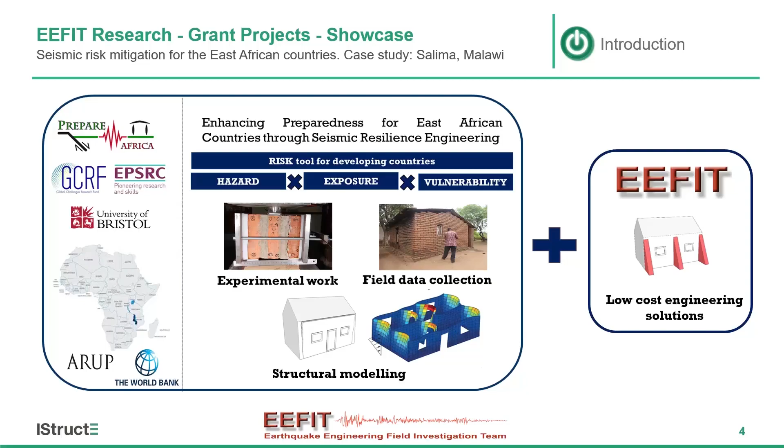And thanks to EEFIT, thanks to this grant, they have supported me in investigating something more specific. Thanks to this grant, I'm looking in more detail at some low-cost engineering solutions for East African countries. Through this presentation, what I'm going to do is bring you to my African experience, if I can say that. So we will look together at the challenges and how I went through to solve them.

I don't know how much you know about Africa. When we talk about Africa overall, there is poverty. If you are born in Africa, you are in poverty. There is a very low income class, and then there are rich people. But most of the people in Africa belong to the poverty level. So there is this perception that there is no hope of lifting people from their poverty, so there is no real long-term solution.

But this is not what I think, and it's not what the people working for developing countries think. And it's also not what EEFIT thinks, because it has funded me on this research. I really believe that light can be brought to these countries, because I've been working in Africa for a few years, and I had the opportunity to meet African people. African people are positive. They have this attitude of doing things in the right way. And they are curious, so they want to know more.

So for us, working on this type of project, we have the opportunity to increase awareness in these countries. How? We can do that by making them understand the difficulties they have when an earthquake impacts a very vulnerable country, as are the different countries in Africa.

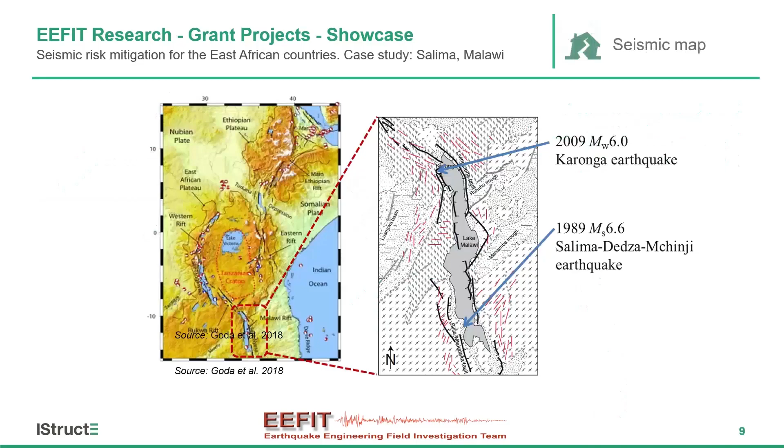Here you can see highlighted 2 major earthquakes that occurred in this country. One was in 1989, another one in 2009. Both earthquakes affected thousands of householders and caused thousands of damaged and collapsed buildings. So the question at this point is, how are the buildings in Malawi?

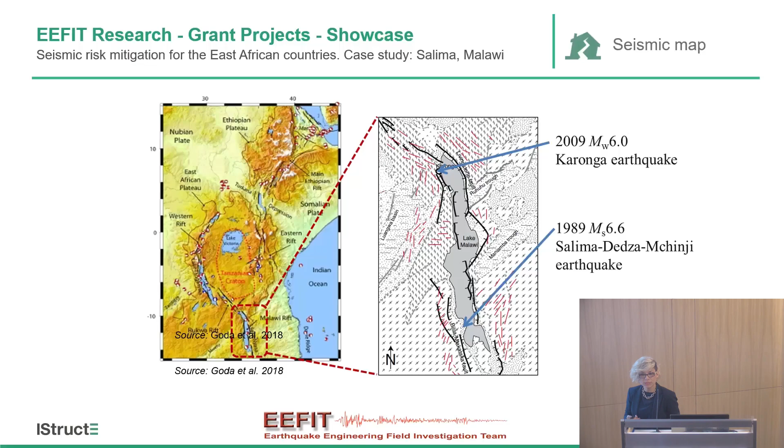Generally, to answer this question, what we do is look at the codes and the guidelines. In Malawi, officially, there is a design code for masonry structures. The design code is based on British standards. So you can already imagine, you don't need me to make you understand, that these codes are difficult to apply in a country like Malawi.

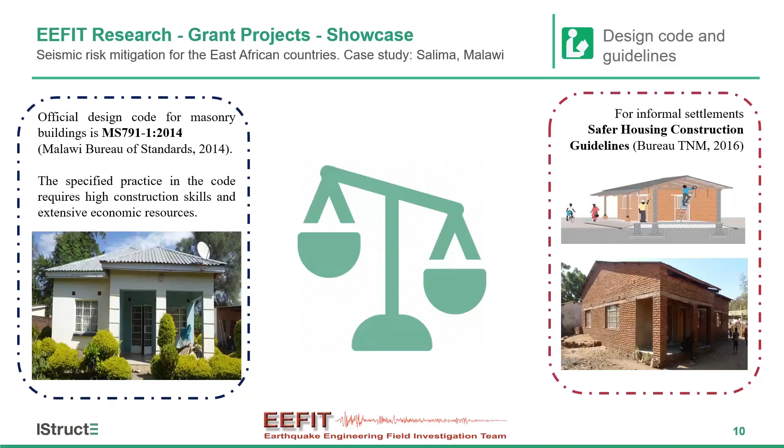After the last earthquake, in 2009, guidelines were introduced in order to make safer houses. But again, there is a big gap between what codes and guidelines say and what actually happens in the country. Local communities do not always opt for the solution indicated in codes and guidelines because they are not usually affordable. So,

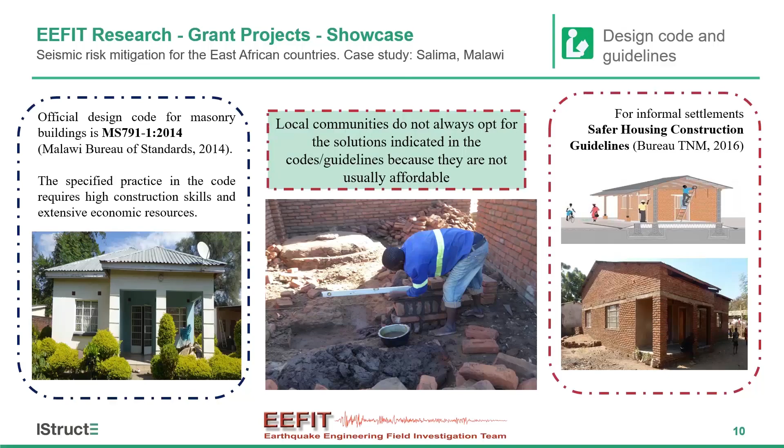in order to understand how buildings actually are in the country, we did an extensive on-site survey. And as you can see from this video, we did that with the help of students and local professionals. We trained them to do on-site surveys. It was a fantastic experience for them because they had the opportunity to look at their buildings in a completely different way, from a structural point of view.

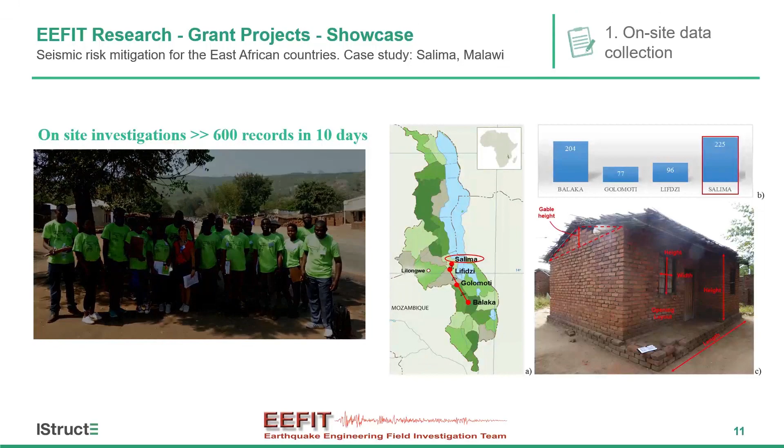And it was a great experience for us because thanks to them, we could speak with the locals and understand better how the construction is and which practices are in use in Malawi. According to the data collected on site, we classified the buildings according to the material quality.

It was a parameter that we needed to introduce because all the houses are made of bricks, but bricks can be very different because they are locally produced. So there is no quality control. This means that bricks can be very different in color and size. Sometimes you can also see stones in a brick. So we needed to classify whether these bricks have good or low quality.

We also identified which buildings have lintels. Very few of them have concrete lintels or concrete ring beams. Most of them don't have any type of lintels at all, as you can see from that picture. There is just the frame of the window, and that's it. And then we also tried to collect data in a way that we could record whether there were any type of irregularities on the buildings, like porticos.

Then we classified the quality of the connection between walls, and also identified the different typologies of roofs. The most typical roofs there are corrugated metal roofing sheets, or, the second one, thatched roofs. Most of the buildings have gables, but as you can see from the pictures, gables are not connected to the roof. So we have very light roofs that are not connected to the structures.

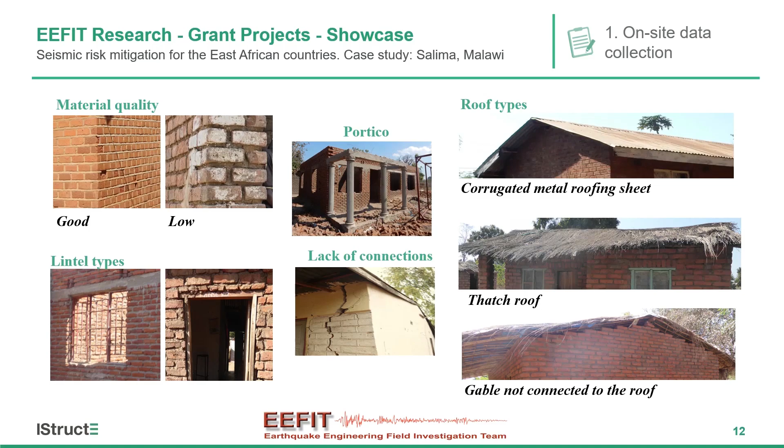According to the data that we collected on site, we classified the buildings in 3 main categories, A, B, and C. As you can see, it's a bit different from the classifications we usually find available, like the worldwide database. We introduced a new parameter, which is quality. When I talk about quality, I'm talking about the quality of the materials, the quality of the construction practice, and the quality of how walls are connected to each other. So using these parameters, we identified 3 classes.

The main class is medium quality. Most of the buildings belong to this class. These are buildings made of fired bricks with a mud mortar, single or double skin. Then we have low quality. In this case, we are talking about houses made of unfired or fired bricks with mud mortar, and they are single skin. And then we have high quality, buildings made of fired bricks with cement mortar and concrete lintels, again single or double skin. Of course, this high quality is defined according to the quality that we observed on site.

After we identified the geometry and the structural condition of the houses, we went to find a way to characterize the mechanical properties. As I told you at the beginning, bricks are locally produced in kilns. As you drive along the country, you can see many kilns. And the problem with the kilns is that it's very difficult to keep a constant temperature.

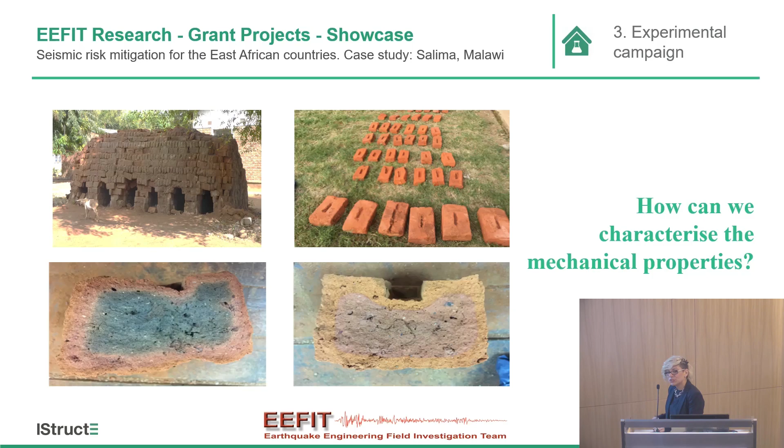So bricks can have different sizes. You can see here, actually, there are some very big ones. It's not just the perspective of the pictures, but I can assure you that they are bigger than the others. So there is an issue that we need to characterize the materials.

In order to do that, we actually carried out extensive testing. This was carried out at the Polytechnic of Malawi. There was a bricklayer helping us to do the basement. We did different types of testing to characterize the bricks and the mortar. We did a tension test. We also did some specific tests in order to characterize the performance in plane and out of plane of

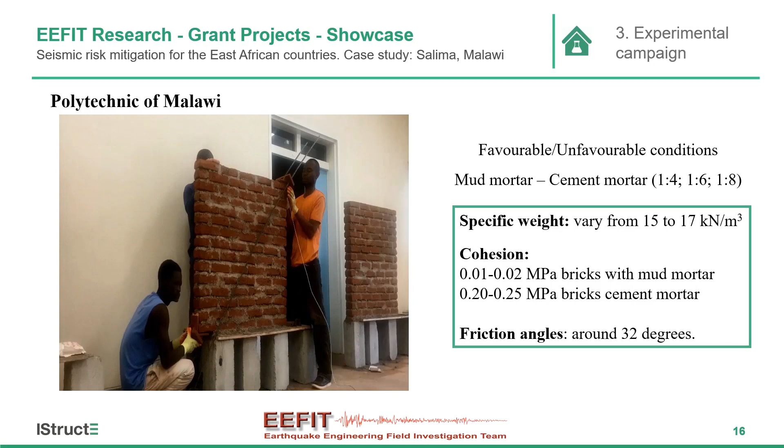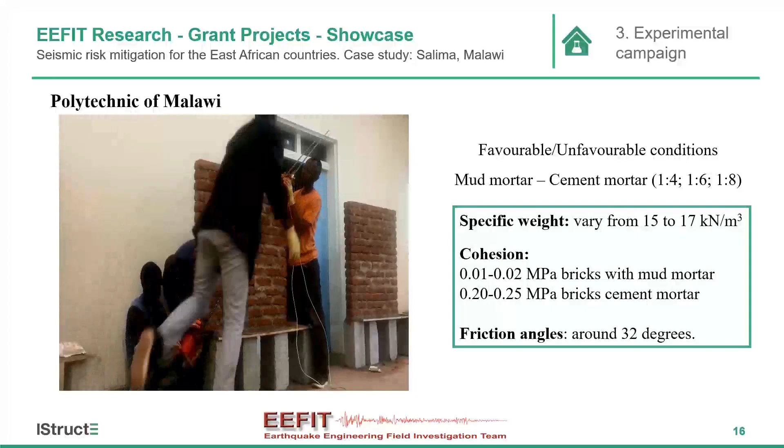the panels. Here you can see an example of the testing that we did this year. We tested panels in different conditions, favorable and unfavorable. That means that the bricks were soaked in water or dried. We also tested different types of mortars, mud and cement mortar, with different cement content. Some 1 to 4, which is what is recommended by the guidelines, the design codes, 1 to 6 recommended by the guidelines, and 1 to 8, which is the most common cement ratio that is

used in practice. According to the different tests, we characterized the mechanical properties of the bricks, considered the different conditions that we tested, and then we correlated what we tested here with what we observed on site.

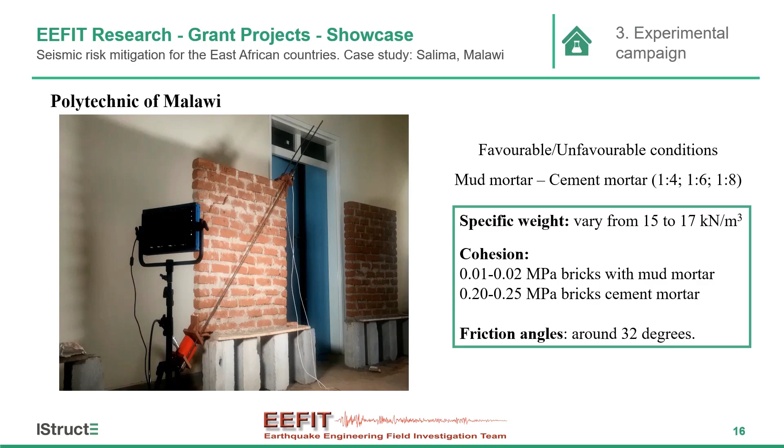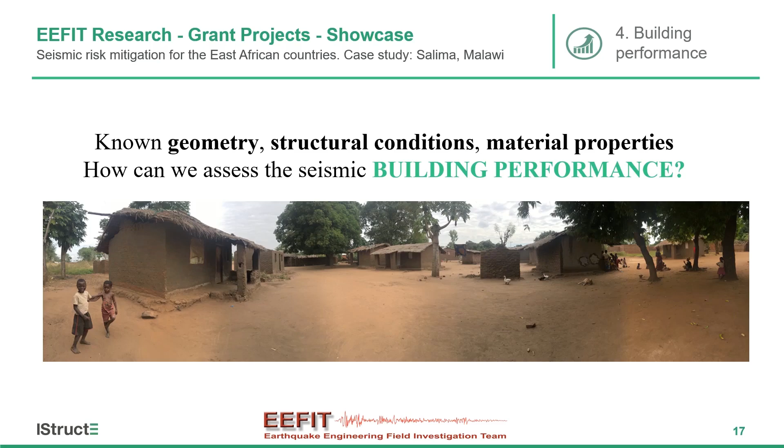So, knowing the geometry, the structural condition, and the material properties, now the question is how we're going to assess the seismic performance of these buildings. We use a limit state analysis based on kinematic models that assume that the masonry structure behaves as a rigid body which rotates or slides according to the geometry and the structural condition between the roof and walls. The aim of this approach is to identify the load factor multiplier that identifies the failure mode that has the highest probability of occurrence.

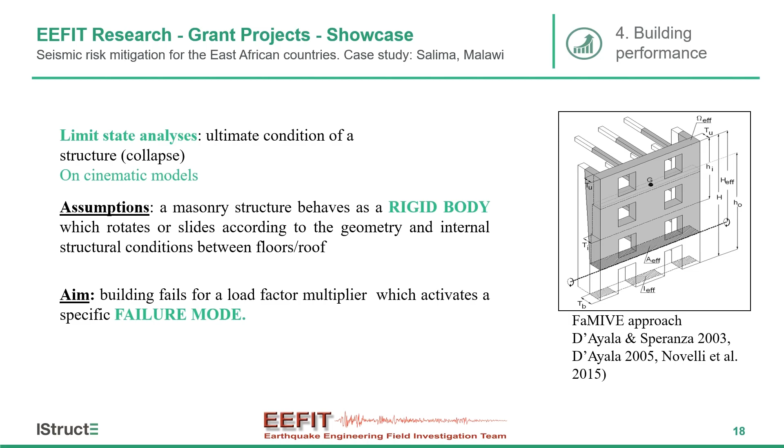But which are the typical failure modes of these structures? In order to answer this question, we looked at some pictures from the past earthquake, 2009, 10 years ago, and we observed the typical failure modes for masonry structures. The first one, out of plane, occurs in buildings that have a very poor connection between walls and poor quality of materials, poor bonding.

Then we have B, which is overturning of the gable. This is very common, considering that, as we saw earlier, gables are generally not connected to the entire structure, to the roofs. Then we have C, which is the overturning of piers or spandrels. And then we have the last two failures. One is in plane, which you probably know better than me, that occurs when buildings have good connections, so we have a box behavior of buildings. And the last one is related to overturning of the corner. Of course, C, D and E occur when buildings are better constructed.

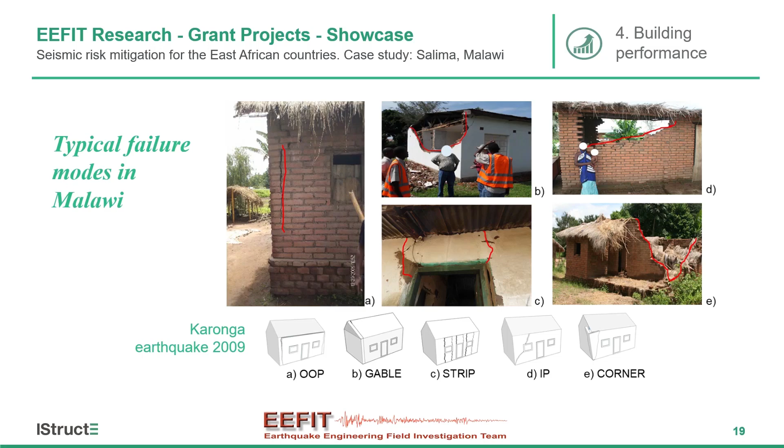So using this approach, we tried to estimate the failure mode distribution for these houses. As expected, out-of-plane failure is the most common one for this type of building. Then we have gables, and then the strips, which have a higher percentage. And we still have very few buildings failing in-plane or at the corner. This is due to the fact that even when they are better constructed, the materials are very poor and the cement content is very low, so they still have a very low performance under earthquakes.

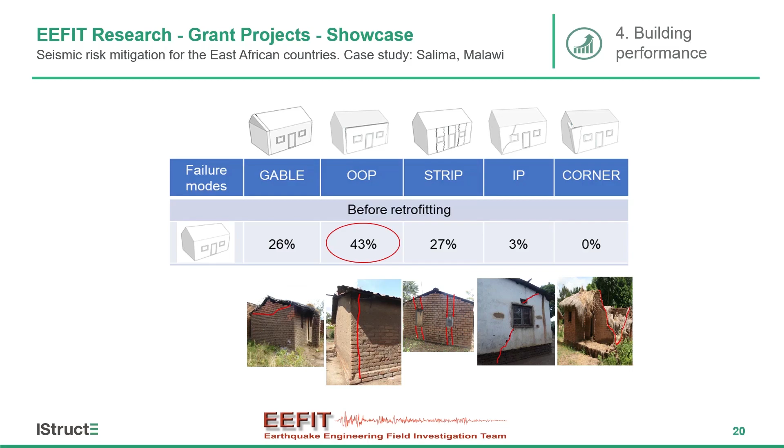So in order to prevent the most common failure modes that occur for these buildings, the idea is to propose low-cost engineering solutions, because it's very difficult to introduce new techniques for these countries. We actually rely on a technique that is already used in practice. It's the use of buttresses.

The point is that in Malawi, buttresses are used, but they are not used to prevent out-of-plane failure. They are there because people spend most of their time outside their houses, so they need a private space to spend their time. You see women and children stay there waiting for their men, who probably don't work in the village but work in the city or in Mozambique.

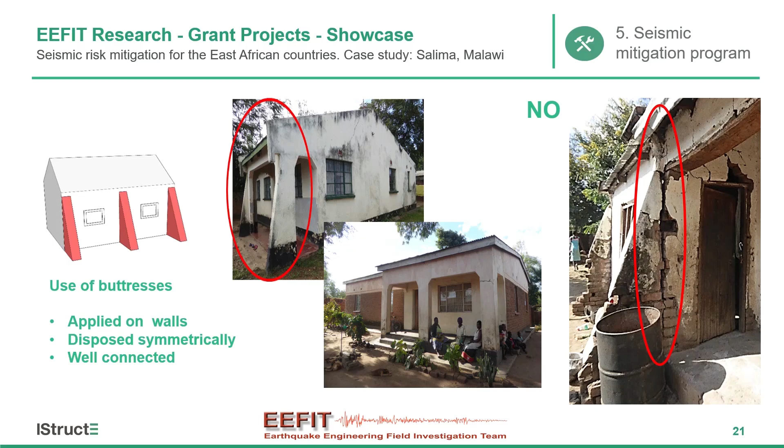And so the idea is to reuse these same structural elements, but with a specific aim to prevent overturning, and avoid something like this. This is what you can see very often in Malawi. Buttresses are there, they are not connected, and there is very poor maintenance of the buildings.

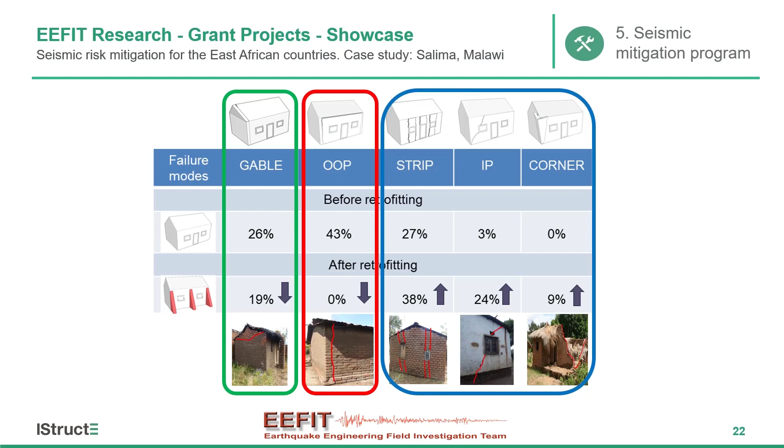This slide shows you how the use of buttresses can improve the performance of these structures. We have a reduction of overturning on gables. Out-of-plane failure is completely prevented by using buttresses. And then, of course, we have more houses failing in these other types of mechanisms.

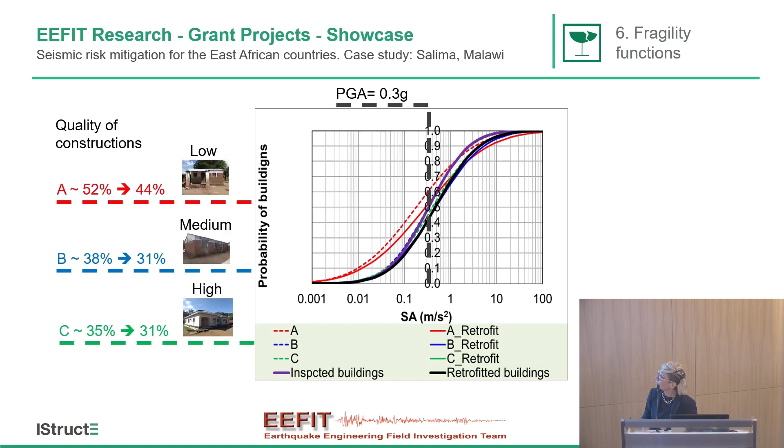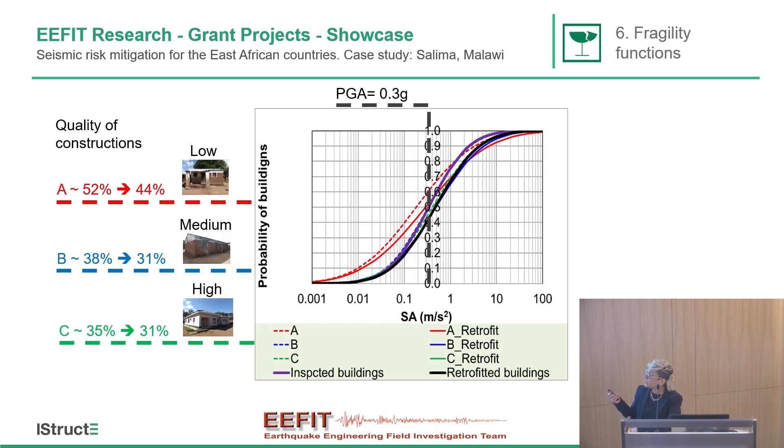But in order to understand how buttresses work and which classes of buildings are most affected by the use of buttresses, I also produced fragility curves for quality of construction. It's very interesting to see that we have 52% of buildings collapsing if they are in class A. This percentage is reduced in class C, when buildings are constructed with better materials and with cement. So this percentage is reduced from 52 to 31 if we also use buttresses.

Just to summarize, in this work you have seen the efficiency of using buttresses, but please look at the report if you want to see more. There are also other types of low-cost engineering solutions proposed for other deficiencies identified in the buildings observed on site. This strategy has been applied specifically for Malawi, but the same approach can be extended to a bigger framework to assess the risk. We start here from Malawi, but the same approach can also be extended to other East African countries.

Before ending this presentation, I would like to give you a message from working in these countries. Whatever we talk about in this room, all the work that we do for developing countries can become important tools to enhance seismic resilience in these places. These tools can work, but only if we do a lot of dissemination. When I talk about dissemination, I'm talking about training, workshops, and also using local radio, because our tools and our knowledge need to be transferred to them. If these tools are left in a chest, they will not make any difference.